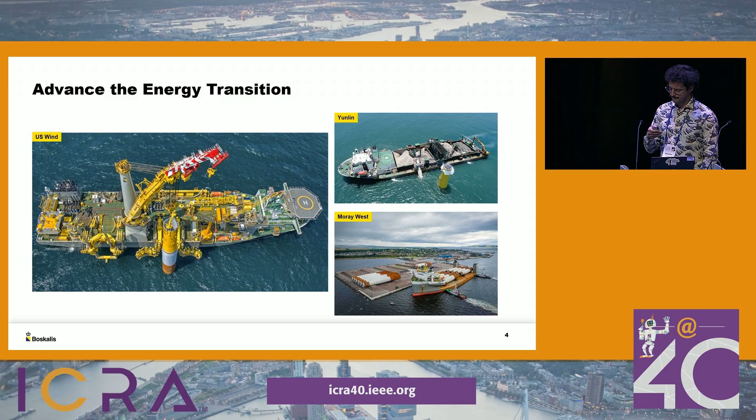A large part of our company is busy with the ambition to shift from fossil fuels to renewable energy. Here is a heavy lift vessel which installs monopiles. We can transport these monopiles ourselves all over the globe with our own transportation vessels. Before a monopile is installed, we have rock dumping vessels used to level the seabed, and after installation we use rock to prevent erosion at the foundation. To give you an impression of the scale, the diameter of such a monopile is basically the length of this stage, and the length of the monopile is 120 meters. That's usually the scale at which we work, which makes it a challenge to introduce currently state-of-the-art available robots.

Another part of what we do is protect the hinterland through climate adaptation measures, such as preventive measures against coastal erosion and flooding. We do a lot of beach replenishment - here you see a photo of 3 hopper dredgers rainbowing at the coast of Texel - and we reinforce dikes, which you see here at the Markermeer.

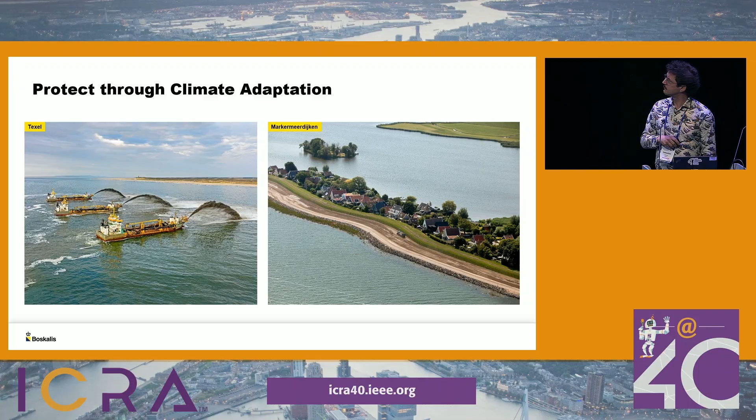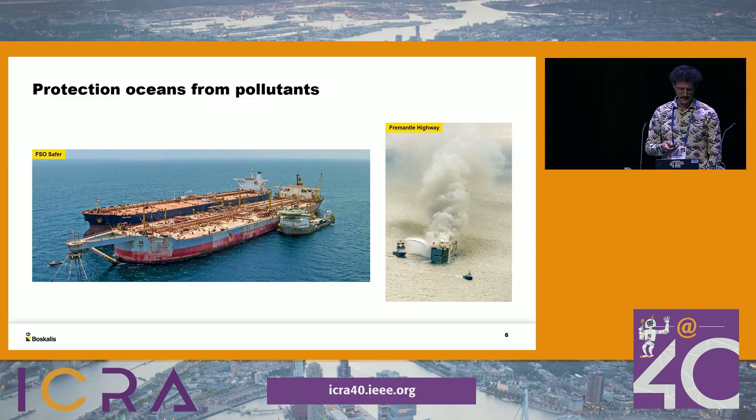Lastly, throughout our projects we try to incorporate a lot of effort into biodiversity and ecosystems. We built, with local communities, a sustainable coastline with mangrove protection in Java. And we print our own artificial reefs with a 3D printer at Papendrecht and install them - in this case, at the bay in Monaco.

I'll give the clicker to Harold to continue. Thank you. So what we see throughout our company is that robotics more and more gains ground, and that's primarily driven by four reasons. The first is an ever-driven, everlasting need to increase safety on our projects. Secondly, our workforce gets older, and we want to employ our employees where they have the most impact and leave the tedious and simple jobs to robots. Thirdly, with the energy transition and climate adaptation, we see more projects, so we need to increase our efficiency to keep up with that increase. And fourth, we want to increase and embed sustainability more in our company, and robotics can play a role in this.

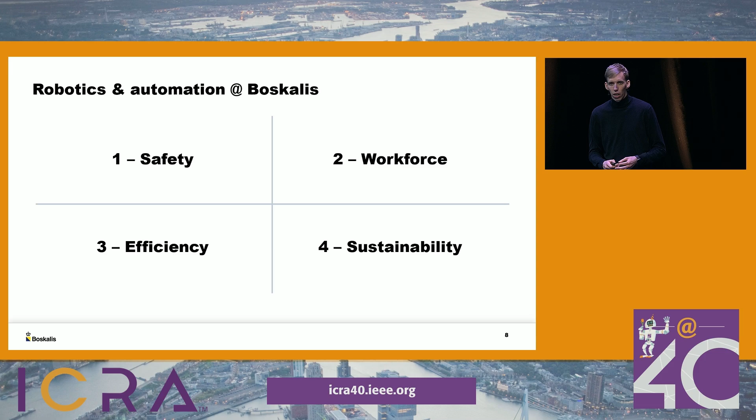In the next couple of slides, we will show previous attempts of implementing robotics in our company, and we also touch upon some of the challenges we see here.

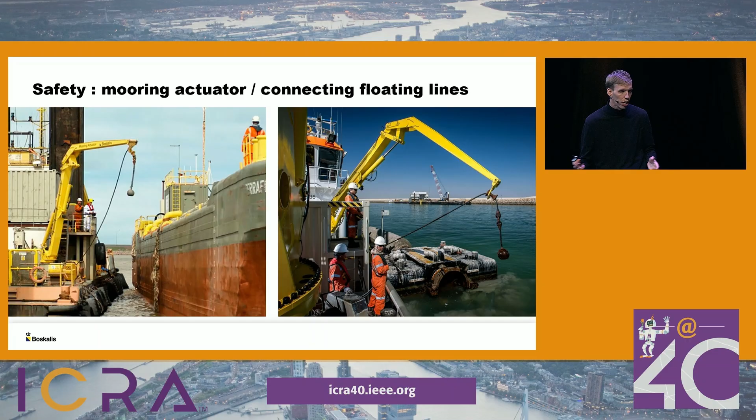On safety, we work with quite a lot of big assets, and limiting interaction between these assets and humans is a quick win for safety. So one of the things we did is, for mooring operations, getting one vessel beside another, can we limit the interaction with humans there? Can we move to a remotely operated system? That's what you see here. The ball gets attached still by a human, but the rest of the operation, pulling the vessels together, is done by remote controlled operations.

Secondly, in the underwater domain, we sometimes come across areas where there is no visibility. We cannot deploy divers, we cannot deploy simple or general ROVs, and normal acoustic sensors are not working due to confined spaces and interaction with walls, etc. Can we move to tactile imaging? That's one of the questions we're currently working on.

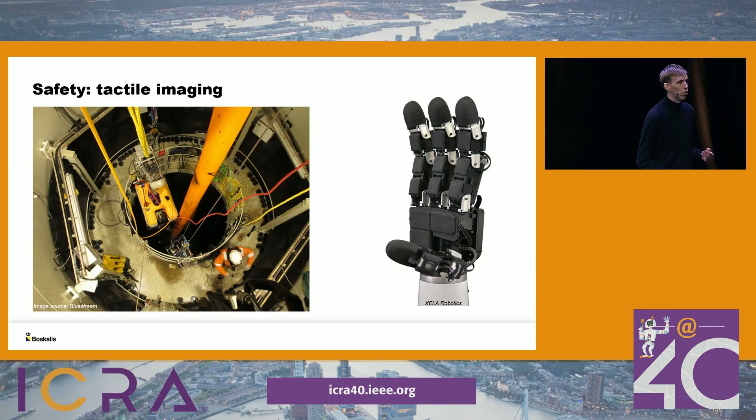On the area of efficiency, we want to have more information, more measurements on, for example, turbidity plumes. During dredging operations, some of the sand we try to dredge up gets spilled and is suspended in the water column, and we need to improve our modeling of this so we can mitigate it.

So swarms might be one of the solutions for this. We're currently looking into whether we can build a simulation environment for these operations so that we can show people within our company what our ideas are and also quickly iterate over the ideas we have.

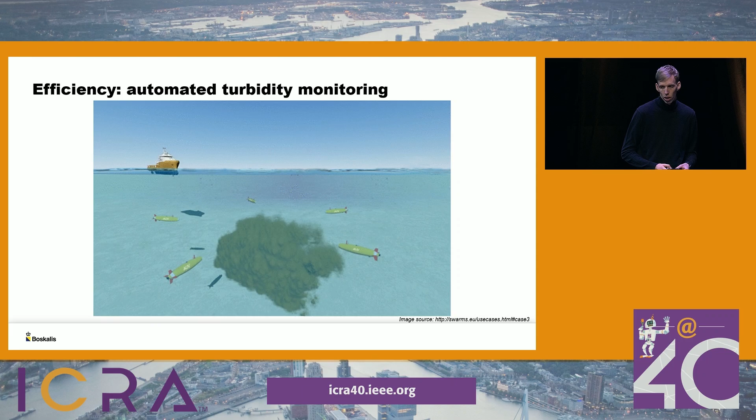Another one on efficiency is, can we use machine learning to detect damages from images or videos, see what the interesting parts are, and then send divers only to those interesting parts instead of having a diver scanning every square centimeter of a wall, which takes a lot of time and isn't the most efficient approach.

The third area is workforce, and with the aging of our people and the more complex tasks they get, we're looking into more autonomy in our operations.

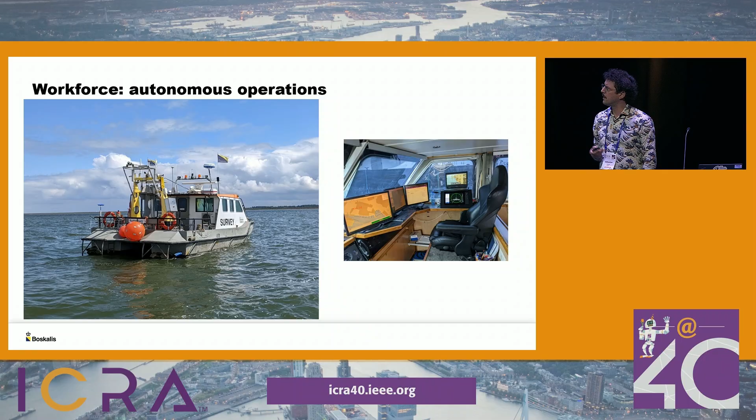So we did a test. We converted a manned small survey vessel into an unmanned vessel with the help of an American scale-up, Sea Machines Robotics. Basically what we wanted to see is how easy the conversion goes and how well it sailed compared to the captain. It took me and an E&I colleague 7 days to prepare the conversion, 3 to 5 days to commission. We did the tests on the Markermeer, with actual inland shipping, a collision avoidance test, following a boat, and so on. In the end, the captain was happy to tell us the machine didn't outperform him. So, case closed, I guess.

That's not true. Another one, which we worked on together with the RAM lab, involves a large cutter dredger. The cutter, which you see at top right, is lowered down and sucks up soil. The teeth on top of this cutter wear out, and you see here 10 people standing in front of the cutter to change these teeth when they are worn out. So we did an exercise.

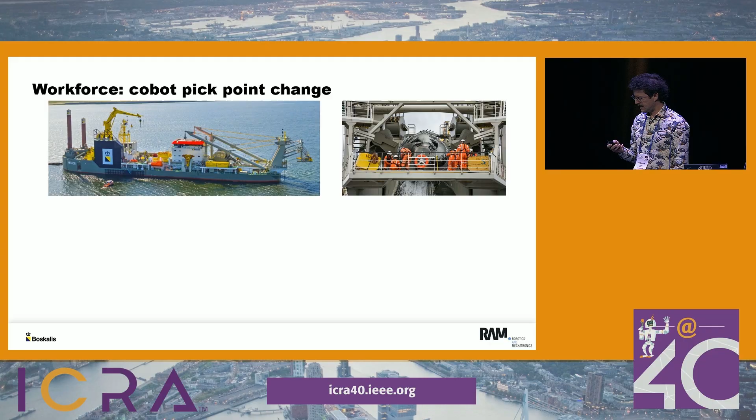Could we help these people maintain their physical health, so they don't have to lift weights of 30, 35 kilograms every 10 minutes, by researching different robot arms or pulley wire systems to assist them?

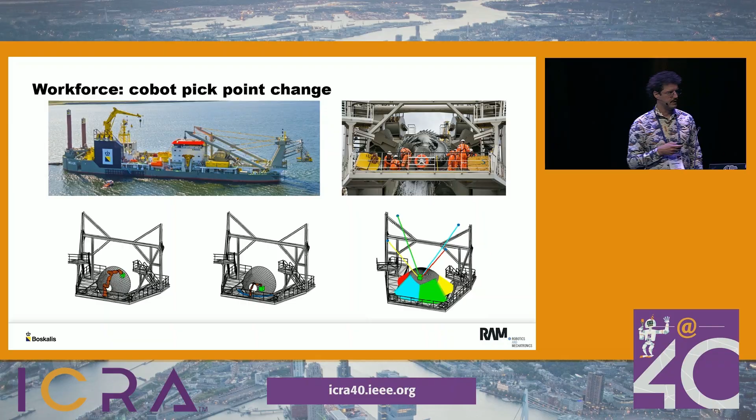The last category is sustainability. We were part of the i-Botics consortium, a national consortium of TNO, Rijkswaterstaat, and University of Twente, where we investigated the ease of building up a digital underwater twin to see how easy it is to do predictive maintenance. Basically, predict when you need to do maintenance and lower costs, instead of being surprised when an underwater asset breaks down and costs go into the millions.